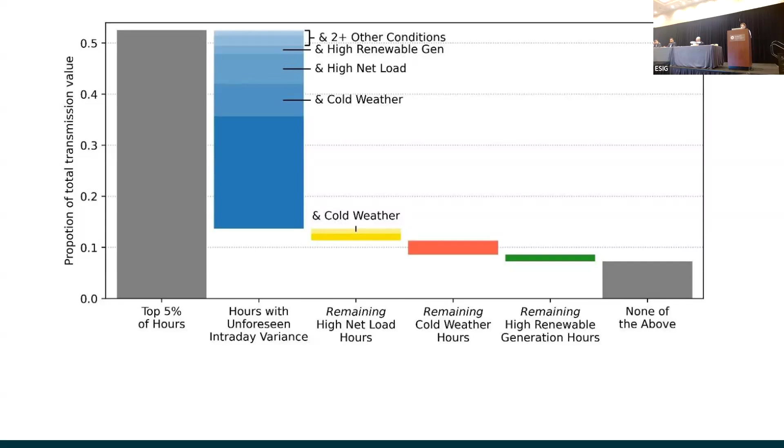But then we looked at some other factors too, like high net load hours or cold weather hours or high renewable generation hours. And the key thing to notice here is that those bars are very small. In other words, on their own, things like high net load or cold weather or high renewable conditions do not lead to these high value transmission conditions. But in combination with some sort of unexpected variance, those conditions can lead to high value hours.

And then finally, there's this chunk, the darkest blue chunk there of the unforeseen variance that's not associated with those particular other drivers we looked at. And we have active research right now looking into things like load forecasting errors and outages as drivers of the rest of those potential high value hours.

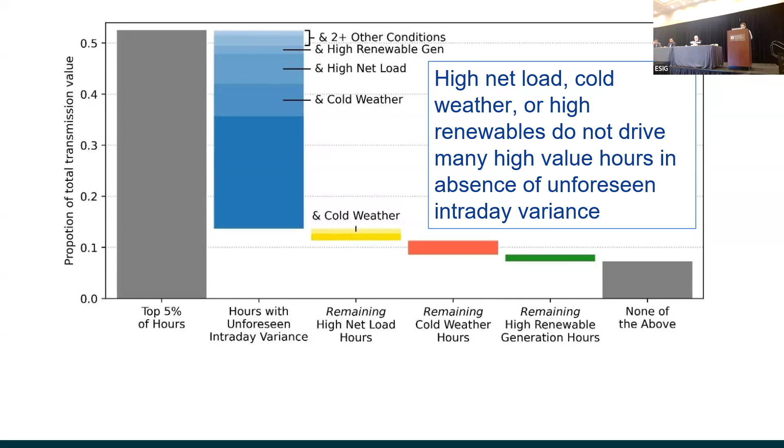Okay, so far we have seen where and when transmission is most valuable, and we saw that it's interregional links and especially cross interconnect links. We saw that over time, value varies annually with average prices and natural gas prices, but there's no particular evidence for a long-term upward trend, really. And one other note about the where is that we saw these interregional links and cross interconnect links were pretty balanced in terms of which side drove the value.

We saw that transmission value was heavily concentrated in time, so just 5% of hours accounted for a large portion of it. We saw that the high value periods were associated with this unforeseen intraday variance specifically, and that a few other potential drivers were not strong drivers on their own, so high net load, cold weather, renewables rarely drove high transmission value periods on their own without something unexpected.

Okay, so now we're going to move on to the last section, where we look beyond this marginal value metric and do a scoping comparison to published cost estimates of a number of transmission projects. So in order to move beyond marginal value, we have to understand how there could be price convergence as you have transmission. On the low price side, when you have transmission, you march up a supply curve to a slightly higher price. And on the high price side, you similarly add transmission and march down the supply curve.

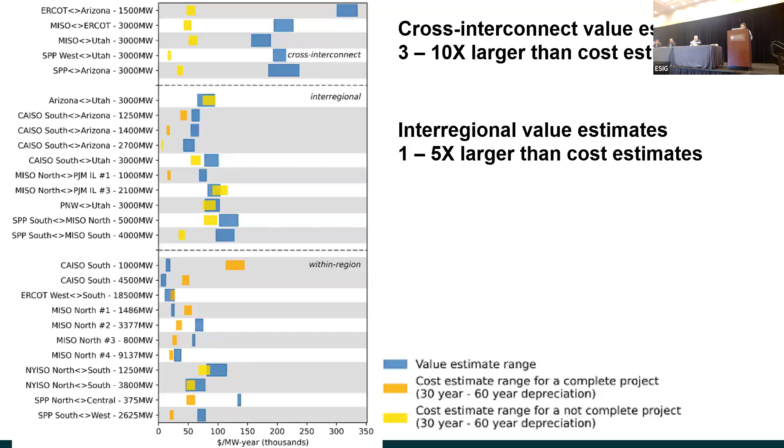Number one, if we look at the cross interconnect value, just from the energy market signal, we see that the value estimates there are much larger than the cost estimates. So that indicates that there's potential value to pay for this infrastructure. In the interregional set, so now not cross interconnect, but cross system operator region, we see similar but a little bit muted. Some of the costs and value estimates overlap, but some of them are still quite a bit larger. And within region, some value estimates are lower than the cost and some of them are higher.

All right, so I will conclude here. Many transmission links have significant values. This is the identifying value piece. As indicated by market prices, there's quite a lot of potential value there. And that's not just the marginal value, but also after attempting to account for price convergence as you add infrastructure.

We really focus on the interregional links and the cross interconnect links as especially valuable. And when we compare those interregional and cross interconnect links to cost estimates, that really provides some context for the value signal for the market, and that it's much larger than the cost estimates for those cross interconnect links.

Now, hopefully you also have a lot of questions from this work. We certainly do, and so we're doing a bunch of follow-on research to try to answer some of the questions that have arisen for us. We're looking more deeply into this unforeseen intraday variance and what specific aspects drive the unexpected changes between the day-ahead and real-time market and how that then might affect transmission value.

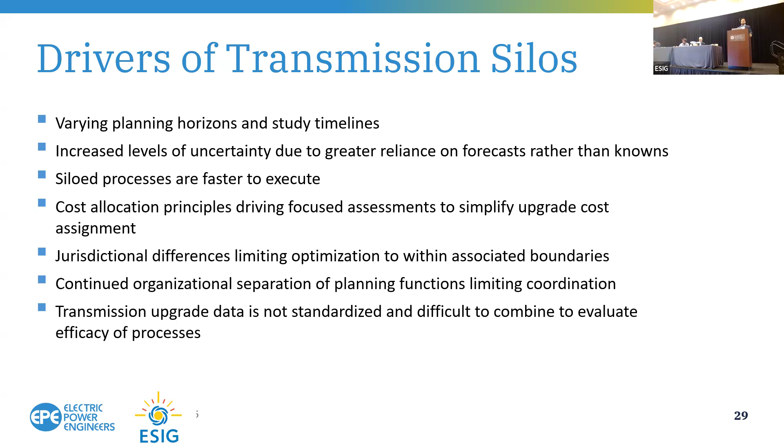And so let's take a look at some of the recent investments that we've seen. I do want to commend MISO on LRTP, and I know they won an award for it yesterday. So significant investment there, and a lot of this actually is multi-need. They look at policy, economics, reliability and enabling generation interconnections. So a lot of multi-need planning happened in that instance.

SPP recently released a 7.7 billion portfolio, including 765, which is really encouraging for that transmission backbone. We talked a little bit about interregional a moment ago. MISO and SPP have come up with a really good process for JTIQ to help address issues on those seams between their jurisdictions. PJM has recently done a $5 billion portfolio for RTEP Window 3. And we're in Texas. ERCOT has previously announced a 13 to 15.5 billion Permian Basin plan. I think we'll find out next month what voltage level that is. I'm cheering for 765. Hopefully we can get that.

And California's also had a large transmission portfolio, the 6.1 billion last year, and New York's recent Long Island public policy transmission portfolio has been around 3 billion. So lots of expenditures happening. Because MISO has great data, and I thank you, MISO team, for publishing this, we're going to take a little bit of a deeper dive into what they've historically been improving over the past few years.

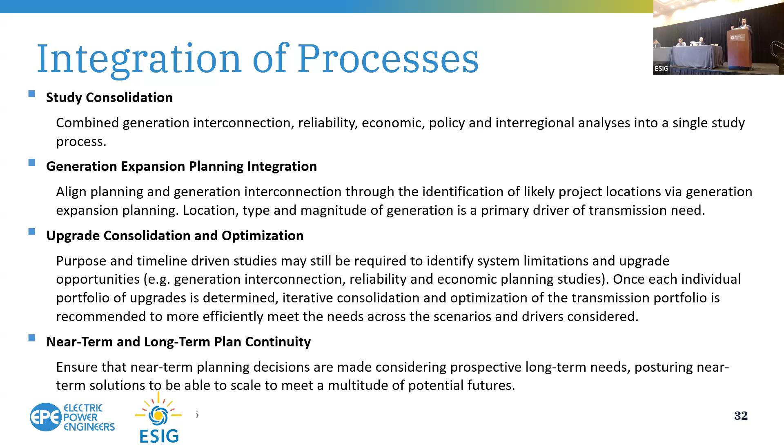It makes sense to build a double circuit tower, hang one circuit on one side, and then in the future give yourself that optionality to add the other circuit. I know it's a very simplistic example, but it is trying to illustrate that you need that continuity between the two so that they're coherent and not conflicting with each other.

Expanding breadth of planning. So certainly policy is really important. I think a really simplistic example here as well is if you delay considering something like notices of retirement. So when you start to consider retirements in your planning processes, it's too late. Those generally happen a year or 2 years ahead of time. If you had the ability to incorporate retirements into your long-term planning assumptions, you'd be able to better account for those and come up with more effective upgrades to address them along with the rest of your portfolio.

Interregional continues to be an area of opportunity. I think there are some challenges that we have with how to value interregional, how to make sure it's there when you need it. But those are things that we can tackle as an industry together. There are tons of areas that are overgenerated and areas that are undergenerated. And so in concept, there are opportunities to connect those together.

California has a really good process today where they accept applications in, and on a biannual basis, they'll initially look at the projects and review them. In the second year of that biannual process, they'll actually study them as part of their solution portfolio. And so we've seen SunZia as an example come through that process.

We talked about end-of-life assessments. Maybe starting to consider those as part of your planning portfolio and saying, well, if I don't have these facilities, I take them out, what issues come up and how can I address those?

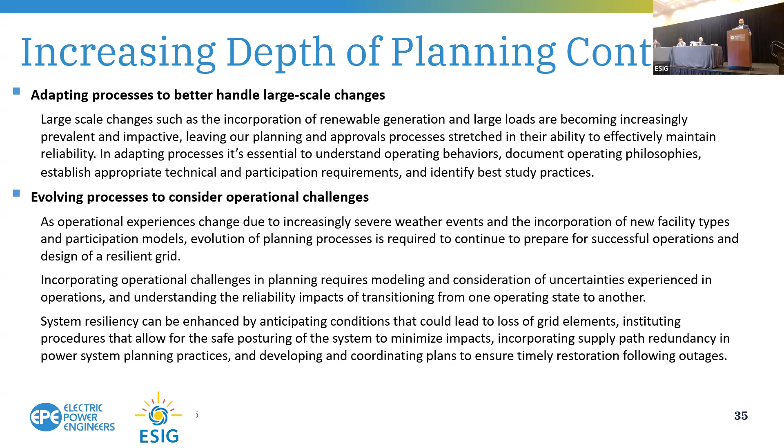Really quickly, work structures. I think we can do some work there to get them more closely aligned so that we have consistent outcomes. In data sets, I mentioned we have MISO having a great data set for us to look into. Having data to help us evaluate how effective we've been in putting together these transmission portfolios would really help us drive into different directions where we're more integrated.

And so I just wanted to share potentially two bookends of what integrated planning could look like. So integration between processes, as we mentioned, you can take inputs: end of life assets, GI, load growth, policy drivers, and continue to do your studies in a siloed way. Look at reliability, look at economics, look at policy, and in the end, consolidate your upgrades. Then you merge that with your long-term planning and your interregional opportunities, see if there are opportunities to further refine that upgrade consolidation, and then you end up with a multi-value and multi-need transmission plan.

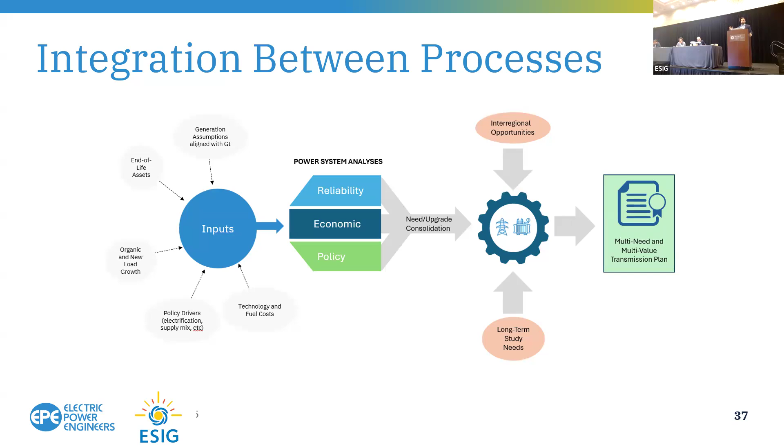That's one approach. A different approach, and this is more aligned with what SPP is trying to do with the CPP, is take your inputs, but integrate the analyses together, coordinate them together, so that they're looking at one starting case, and there's a continuum from there on.

So there's one set of assumptions that you're working with that go the rest of the way. So you have the same starting point, consistent conclusions. Then you go ahead and you can either upgrade that with the needs, you can do a consolidation from that, or you can do an optimization, and then you end up with a multi-need, multi-value transmission plan. So again, the takeaway could be integration between processes and integration of processes and anything in between.

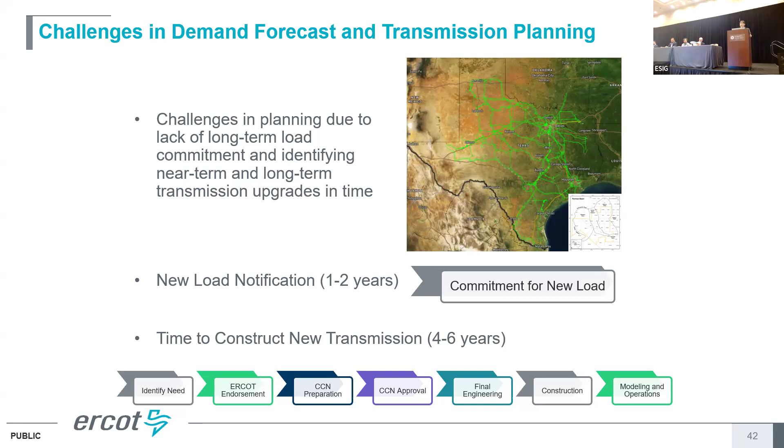But when they come to transmission, they want the connections within 1 to 2 years. So an aggressive schedule, right? But as you can see in the flow chart, it typically takes 4 to 6 years to build a new transmission line on a new right of way in ERCOT. I know it's relatively quicker than other interconnections and other regions of the US, but that's where we have a fundamental difference, and challenges coming from that difference between their side planning and our side transmission planning.

But regardless of the challenges, ERCOT and our stakeholders have taken significant steps to address all those issues and accommodate huge load growth there. As you can see in the time chart, we did a bunch of studies. It goes back to 2013, but I started in 2019, 2021. We proposed billions of dollars of transmission projects. Many of them are under construction. We also work with our university partner to better understand the long-term load forecast associated with the oil and gas fields in the Far West Texas region.

And Texas lawmakers in 2023 passed House Bill 5066, and House Bill 5066 ordered ERCOT to conduct the Permian Basin study one more time. But this time, all load: not just committed load, but also load sponsored by the TSPs, transmission service providers, and also load that's verified by third-party consulting companies.

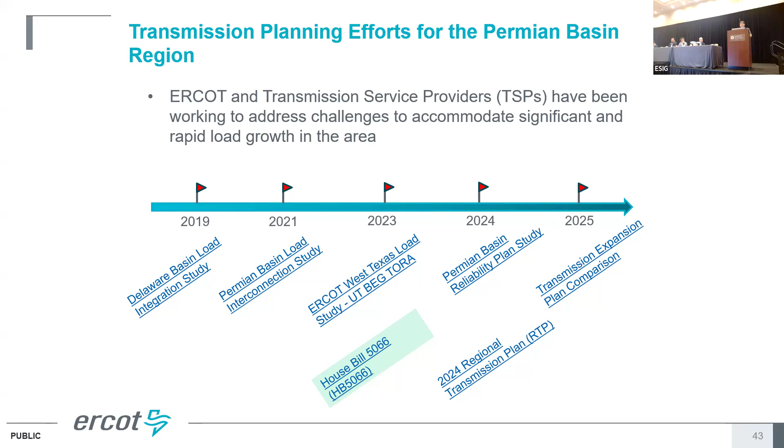But as I mentioned, we also need to look at the entire network to come up with holistic solutions. As I mentioned, load growth happens everywhere within the ERCOT grid. So in the 2024 annual planning assessment, we did a system-wide study on top of what we found in the Permian Basin plan study, to come up with ultimate 345 and 765 kV options for the entire ERCOT network.

The transmission expansion plan comparison white paper outlines the cost and benefits and compares the performance between the two options. A lot of good details, good information there, and we share it with the PUCT so that the PUCT can make informed decisions by reviewing that white paper as well, right?

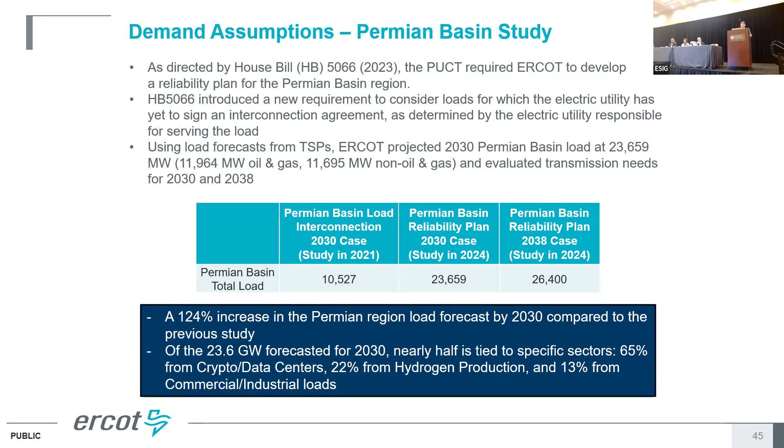That brings up one of the challenges, because it not only requires major upgrades for the local network, but also requires major transmission highways, right? Connecting generation sources to the major load centers. I also looked at some numbers: the historical peak that we set in 2023 was 86 gigawatts. If we add that 150 gigawatts in 2030, that's going to be an 8% annual average growth. So that's going to be huge.

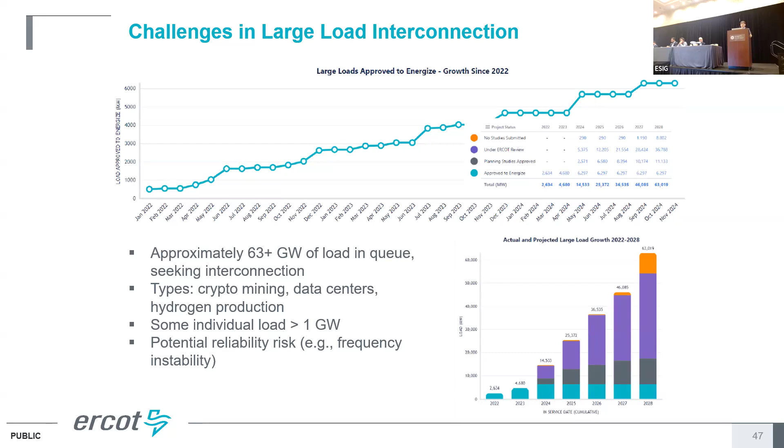As far as generation assumptions, we assumed a huge amount of load in the study. So we also modeled a lot of generation. Many of them are coming from the generation interconnection queue. And about 11 gigawatts were generations that are not in the queue, right? It was necessary to address the generation shortfall in the study cases.

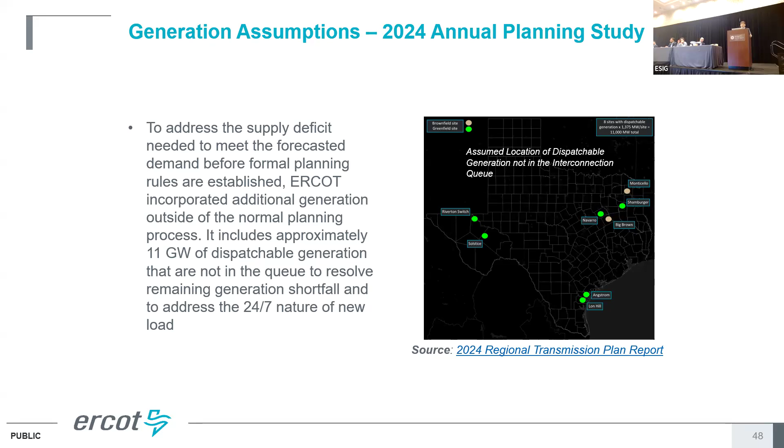And as you can see in the map, some of them are located in brownfield sites where we have generation already retired. That's going to be a good location. And others are located in the regions where we have major infrastructure already under construction or approved by the board of directors. So there are a lot of assumptions and challenges with load and generation.

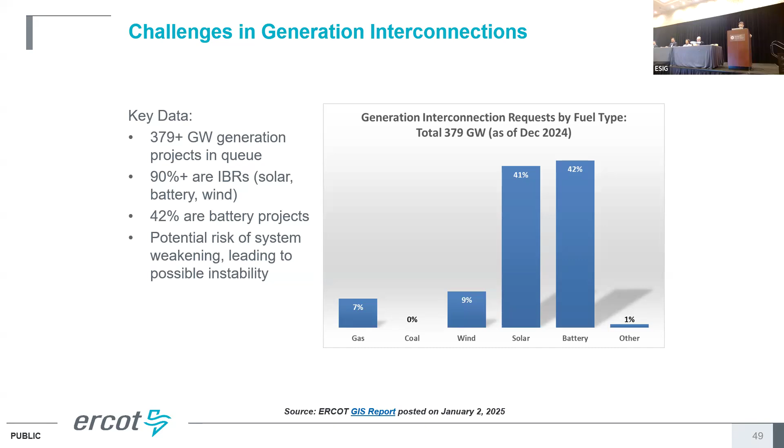And that brings up other potential concerns around increasing system instability issues during unexpected real-time events like Odessa that we had back in 2021. So with all that considered, we tried to consider all those challenges as much as possible and came up with these 2 major infrastructure plans, right?

The green dotted line on the left and the orange dotted line on the right are basically the same as the Permian Basin 345 and the 765 kV plan. And the purple dotted line on the right, that's basically the extension of the Permian Basin 765 kV plan to serve the rest of the grid and to connect all the load and generation resources.

The dark gray line is basically new 345 kV line upgrade or the upgrade of existing 345 kV transmission facility. But as you can see in the map, the 765 kV plan provides a lot less 345 kV upgrade compared to the 345 kV plan. Okay. I just want to mention two things here.

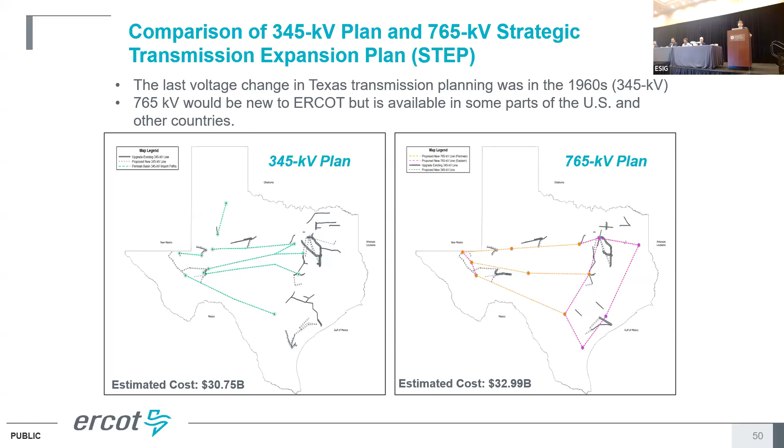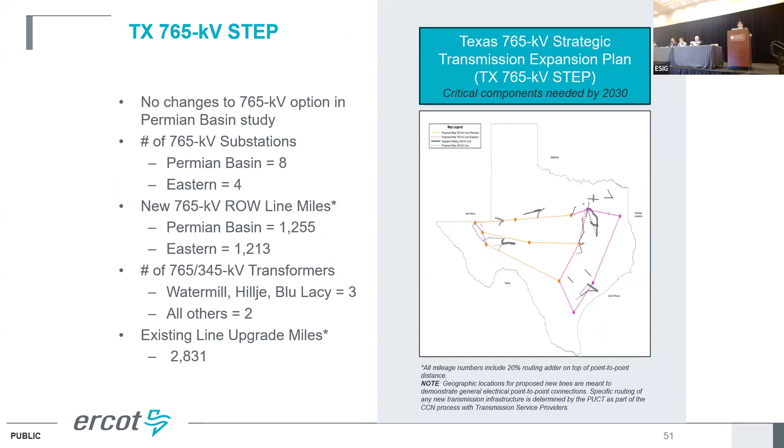In summary, the 765 kV plan that we have requires 12 new substations, and each substation will need 2 or more transformers. Again, the line upgrade mileage is about 2,800 miles, and it's a lot shorter than the 4,274 miles in the 345 kV plan.

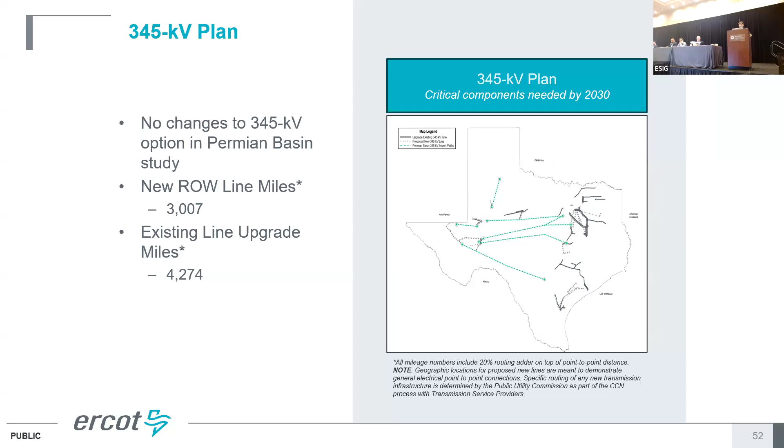This is the summary of the cost and benefit comparison for the two options. A lot more details are available in our transmission expansion plan comparison white paper. I don't plan to go through these numbers, but we did consider mileages of new transmission circuit and mileages required for the existing line upgrade. And we also compared the baseline construction cost, $30 billion compared to $32 billion.

The 345 kV projects are a little cheaper, but that cost gap could be reduced if we consider many other aspects. For example, some of the lines that need to be upgraded go through major load centers, heavily and densely populated and commercialized regions. The crew may not even be able to take an outage window, right? It means they need to take a different approach, such as energized construction, upgrading the line while it is energized or hot. That will add more complexity and cost to the overall picture. So we expect that cost gap to be reduced further.

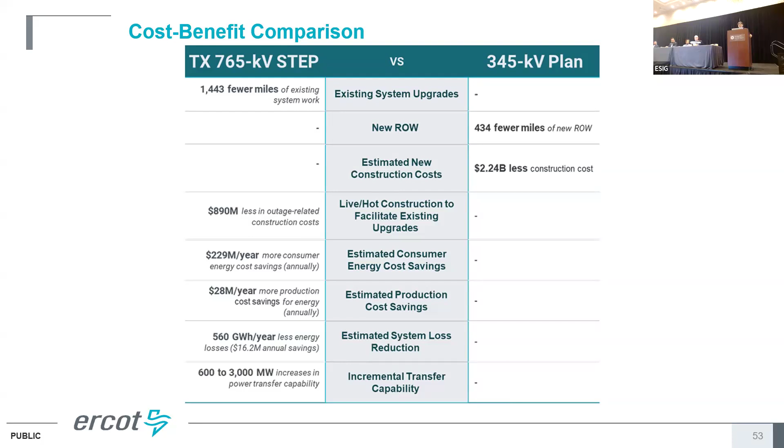This is my last slide. I talked about the challenges. It's not just about the load, it's about the generation and transmission constraints. And the ERCOT market is different compared to MISO or PJM markets. We have a lot of challenges, but according to our study results, the 765 kV option appears to be the better option compared to the 345 kV option. It seems to provide a lot more flexibility, a lot more options for siting new generation, a lot more capacity, and so on. We're still waiting for the PUCT decision on the voltage level, but regardless, we continue to work with our stakeholders to make our system more resilient and stronger. That's all.

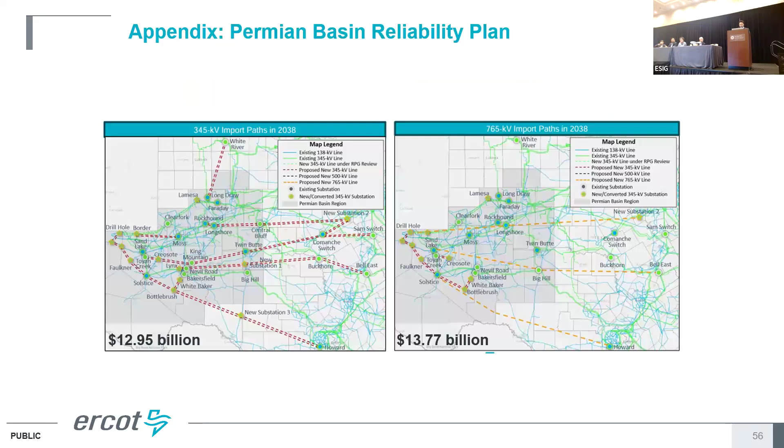I'm going to talk about probabilistic methods applied to the long-range transmission planning process, in particular the business case. We've heard a lot about LRTP, MISO's LRTP, in the ESIG workshop overall. So I'm going to go into the details of how we did it and share with you our experience with our stakeholders, the methods, how we develop those portfolios, how we calibrate them, and how at the end they got approved. So I'm going to go through all that process and focus on a few of the metrics that I think are very important and relevant to the panel, and pose a question at the end of how we can extend these methods that we are using in LRTP at MISO to other processes.

So a little bit of key MISO facts for those of you that are not very familiar with MISO. One of the RTOs in the continental US, our footprint covers 15 states, including one Canadian province, more than 45 million people, and more than 500 market participants as well. We like to call ourselves the coast-to-coast RTO, from the Gulf Coast all the way to Lake Superior in Michigan.

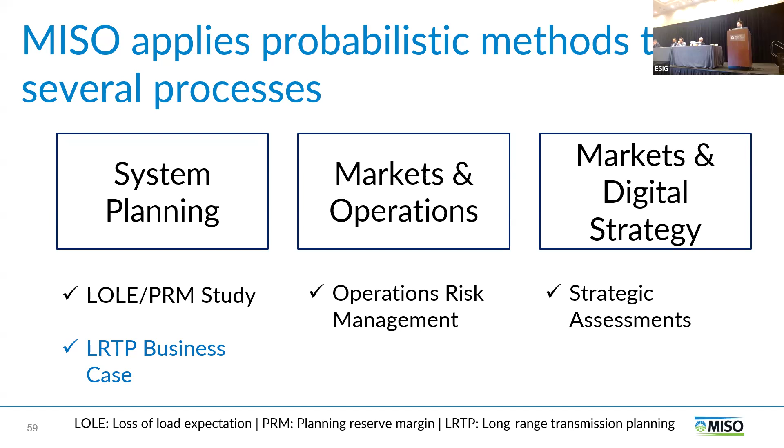So one of the key motivations for this use of probabilistic methods was to incorporate transmission in that assessment so that we can measure the value of a transmission portfolio by applying probabilistic methods. So you're going to see that connection between resource adequacy and transmission planning in this presentation, and that's going to be the focus of my presentation.

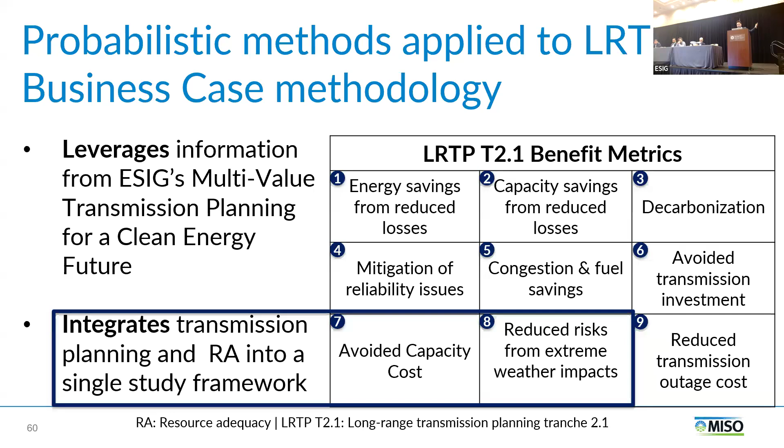So we captured that in our resource adequacy model. There's also load uncertainty, right? Load changes weather year to weather year. So that's another uncertainty that we capture in our resource adequacy process. Transmission is not part of that. We call it resource adequacy, right? Because it's resource focused or oriented. So what we did in LRTP was to say, hey, we have this process that we all agree on, we like.

It incorporates uncertainty and it captures all these uncertainties. So why don't we extend this concept by applying transmission? And it doesn't have to be a full-blown nodal transmission model. It can be a simplified version just to at least capture those effects of transmission in the system by including also the uncertainties related to generation availability, to load, the different effects of weather.

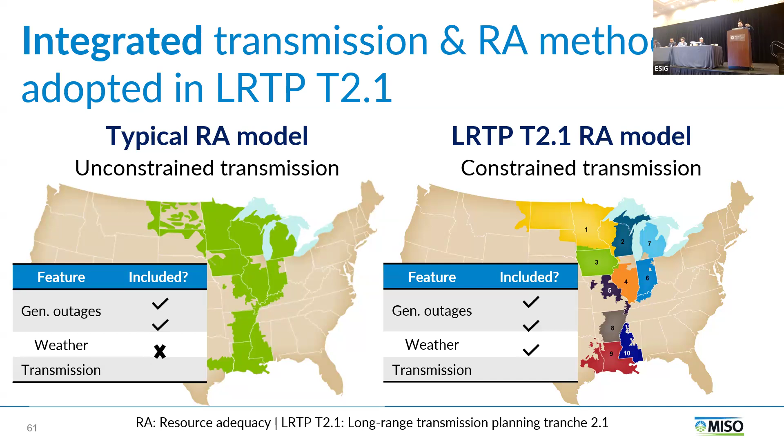So in that second, the right side, that check mark should be included in that one as well. The transmission side, so we included that in the LRTP model that we developed for this tranche 2 portfolio. So I'm going to go into the details here, a couple slides. I'm going to flesh it out a little bit. So bear with me here. We're then going to look at the numbers and why we think it's a good approach that we can extend to our processes. So this is how we get to model.

So we have what we call pipes and bubble model. So we neglect impedances. It's only a capacity based model, both from a generation and transmission point of view. Those links and those arrows that you see between the LRZs or the local resource zones and the MISO hubs are the local capacity import and export limits. So that comes from a transfer analysis that we perform offline, and that information gets used as an input in this model. So we have a MISO hub, and those transfers occur through the MISO hub.